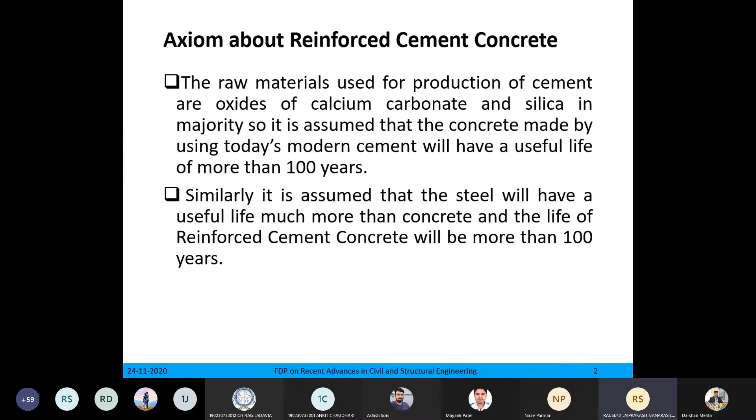Now, what belief we have in our mind is that RCC will have a very long life, and the reason we accept and believe in the fundamentals is that the raw materials used for production of cement are oxides of calcium carbonate and silica in majority, which is a natural item. Its life is, you can say, 1,000 years. So it is assumed that the concrete made by using today's modern cement will have a useful life of more than 100 years. Similarly, as everybody knows that steel will have a useful life much more than concrete, the life of reinforced cement concrete, that is composite material of cement, concrete and steel, will be more than 100 years.

Now, what is the truth which we are facing in today's life? With the advancement in technology in cement and steel, we became more and more confident that any structure made of reinforced cement concrete will have a lifespan of more than 100 years. This is our assumption, we are believing today in this concept, but in the race of development, we forgot the law of conservation of energy, which is responsible for changing one form of material to another form. The cycle time may be few hours to 1,000 years. This we are facing every day in every material, but sometimes we are ready to accept it, sometimes we are not ready to accept the fact.

What is the contradiction? The recent failures of reinforced concrete structures have indicated that if the RCC structures are not properly designed with respect to the environment conditions, which is happening today in many cases, and all practical engineers, if good materials and proper construction practices are not adopted, that may be due to cost cutting, or that may be due to some malafide intention, or proper and timely maintenance is not done. There are so many factors. Multiple occupancy may be there. Everybody may not agree to spending the money for maintenance.

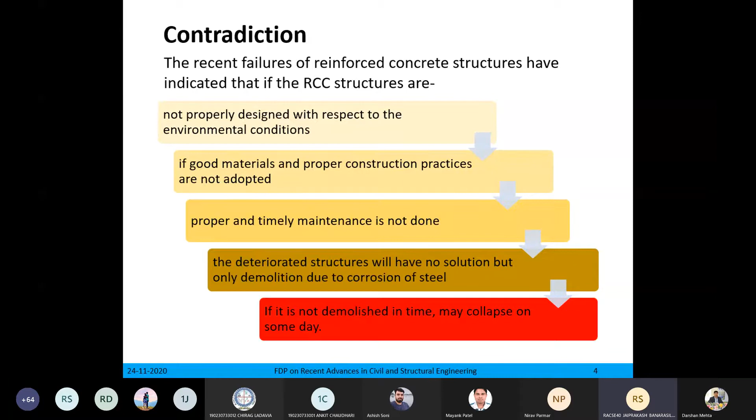We are talking about starting from M5 to now M160. We are going in foreign countries more than that also, but that is limited to very important, costly and unique structures. It is not for common buildings. My point is here that what the general buildings or general RCC structures are facing, for that some solution is required. And this is the reality.

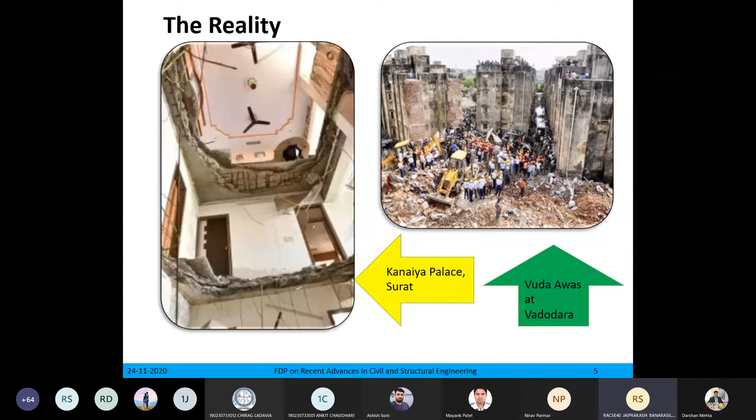This is a very typical case where the 8th floor and 7th floor drawing room fell on the 6th floor slab. The Vuda Awas at Baroda, as the building looks from that, 2 apartments collapsed in the early morning. These are only 2 cases out of thousands in the last 4 to 5 decades. It may be more than thousands.

OK, the first image is of Kanaiya Palace apartment in Surat, built in 1994. In this, slabs of drawing rooms of 3 floors collapsed on 2nd May 2014. You can see the span, it is 94 to 14, just 20 years. And 3 persons lost their life. After that, one committee was appointed by Surat Municipal Corporation. Their opinion was that poor maintenance led to corrosion of steel. Obviously, then simply a concrete mass is there, it fell with its own weight.

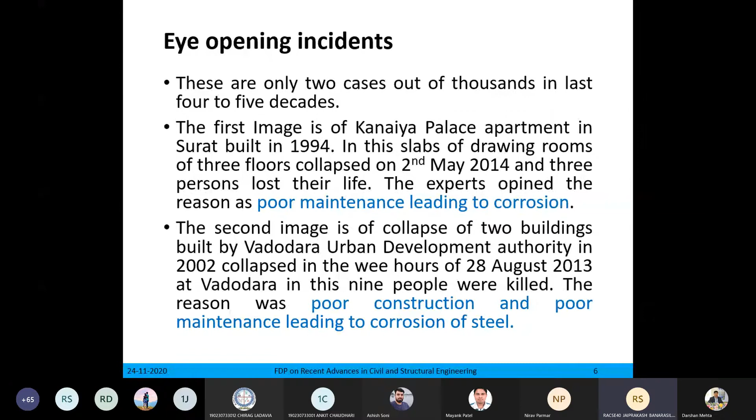The second image is of the collapse of 2 buildings built by Vadodara Urban Development Authority in 2002. That collapsed in the wee hours of 28th August 2013. Here also you can see the span, 2002 to 2013, just 11 years. In this, 9 people were killed. Again, the reason was poor construction, poor maintenance leading to corrosion of steel.

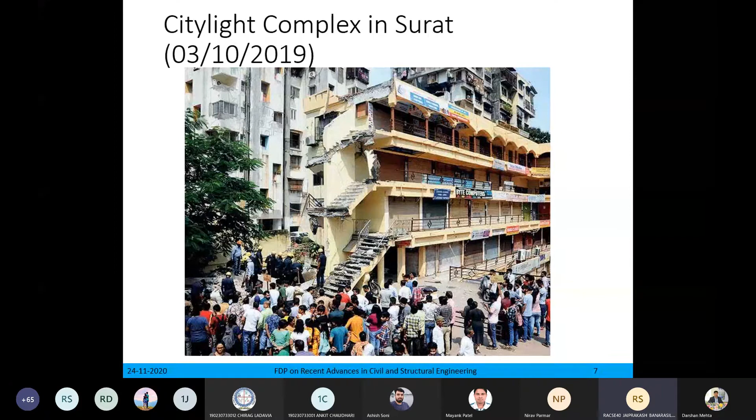Now this is a recent case. This is the case of a staircase. The staircase was external and due to corrosion of steel, on one fine morning, it collapsed. One student got seriously hurt in that because many tuition classes are there in this building.

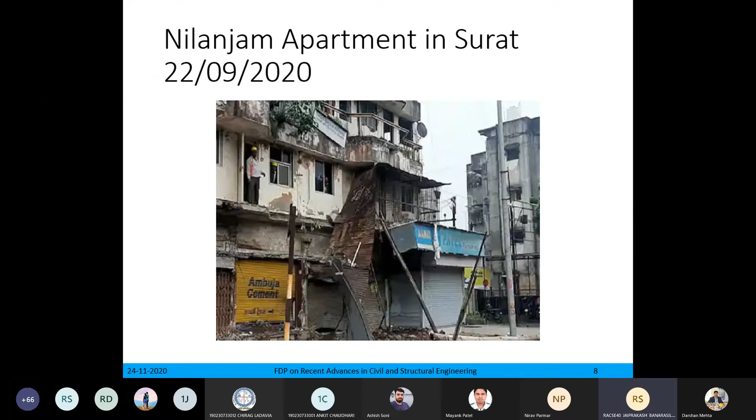This was rejected just 8 months back by the municipal corporation and warning was given to the owners. But here also the case is multiple ownership. It is very difficult. That's why my research was oriented to find some solution wherever multiple ownership is there, because nobody is ready for maintenance.

Then we talk a lot about corrosion. It may happen to any type of material. The definition is: chemical reaction between a material and its environment that causes deterioration of the material and its properties. This is the basic definition of corrosion.

Here we are more concerned about the electrochemical reaction of the steel. In RCC structures, corrosion in both concrete and steel occurs, but corrosion of concrete is a very slow process compared to corrosion of steel. Also, corrosion of concrete gives early warning by its appearance, but corrosion of steel is observed only after it affects the surrounding concrete in the form of cracks.

Otherwise, the picture shows the building. The surface is clearly showing that there is corrosion of concrete. OK, but no care was taken. Then later it affected the steel, and then further corrosion, loss in strength, and collapse.

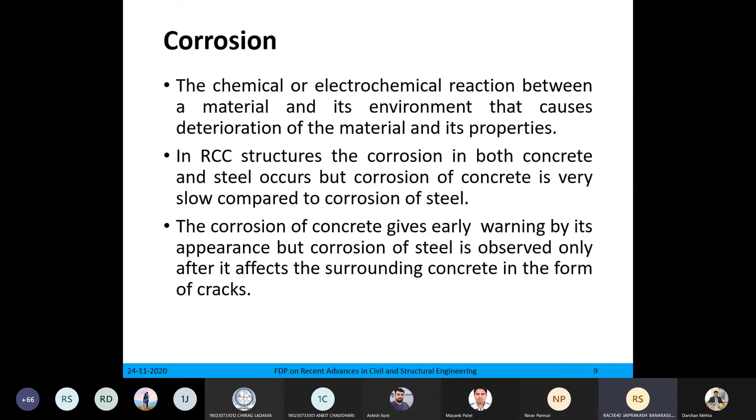Now, as we know there is a need for corrosion protection of steel in RCC buildings, everybody accepts this. It is required because the expected life of concrete is more than 100 years. What we design, we propagate, and we give a guarantee. Every structural designer gives that guarantee that the structure will live for more than 100 years. Similarly, steel also more than 100 years.

The real life of RCC structures, except for a few cases I have gone through where buildings collapse within 10 or 12 years, is generally 20 to 80 years. In Surat, I know many buildings that have completed nearly 35-40 years and are now at the stage of demolition. The major cause is corrosion of steel bars and progressive cracking in structural elements.

Design deficiencies and poor construction along with corrosion lead to failure. Obviously we take a factor of safety of 3, but for any reason there may be some deficiency in the design process, or poor construction due to poor practices or poor construction material. Along with corrosion, that certainly leads to the stage of failure.

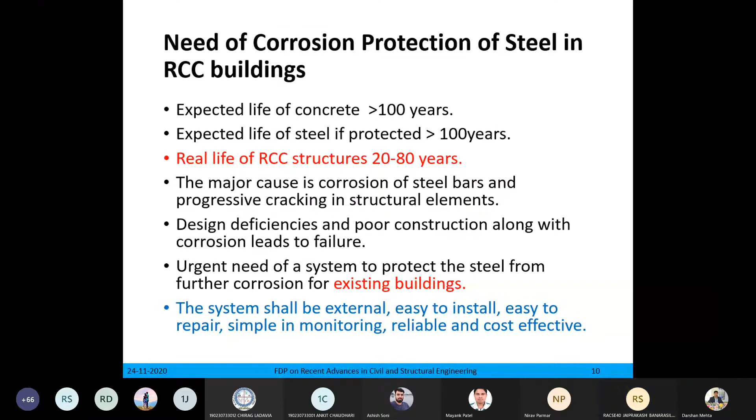And what was the problem earlier, you will see in the next slides. So what was the aim? The system shall be external, easy to install, easy to repair, simple in monitoring, reliable and cost effective. This was the aim from the beginning.

Now, to achieve that, obviously we have to proceed in some direction, so the research is from the fundamentals only. Corrosion process in RCC is electrochemical in nature. The process is very similar to a battery, just like our dry cell: the outside body is made of zinc, inside a carbon rod is there, and between the carbon rod and the zinc body, electrolyte. Positive and negative - so here also the same thing is there in corrosion of reinforcement.

Corrosion results due to flow of electrons between the cathodic and anodic sites of the rebar. Four basic elements are required for corrosion to occur; if these are not there, no corrosion will occur. One is anode, another is cathode, electrolyte, and metallic path.

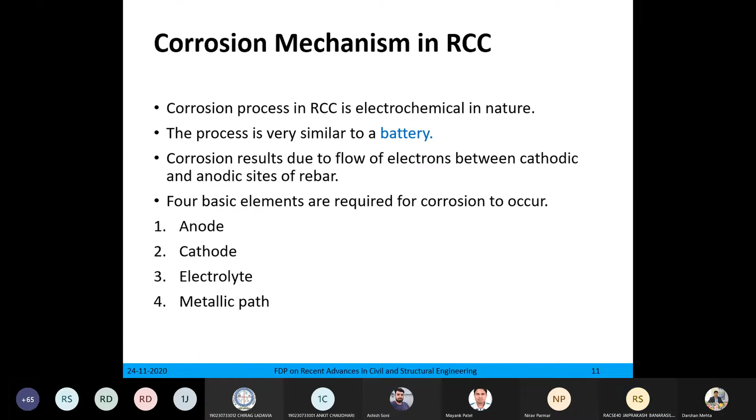So what is happening here? Anode and cathode are both formed in the same bar or connected bars. Electrolyte is nothing but the concrete part - concrete is electrically conductive and in the presence of moisture it is a very good conductor. Metallic path is there, meaning you have to combine these two parts by some metallic connection.

Now, how is this anode and cathode formed in steel embedded in concrete? For corrosion, an electrochemical cell, just like a battery, shall be established. How is it established? The anode is the area where oxidation occurs and electrons are released - this is on the surface of the reinforcement itself. The cathode is the area where reduction takes place, or electrons are consumed. Those electrons move and are consumed by another portion of the steel. This means we are not providing anything from the external side, but still anode and cathode form in the reinforcement.

Steel in RCC acts as only cathode when it is in passive state. Passive means it is on the alkaline side, that is, its pH is more than 9.5. When the passive layer is lost by reduction in the pH of concrete due to carbonation, or by local breakdown, or due to chloride ions, part of the steel acts as anode and the corrosion process starts.

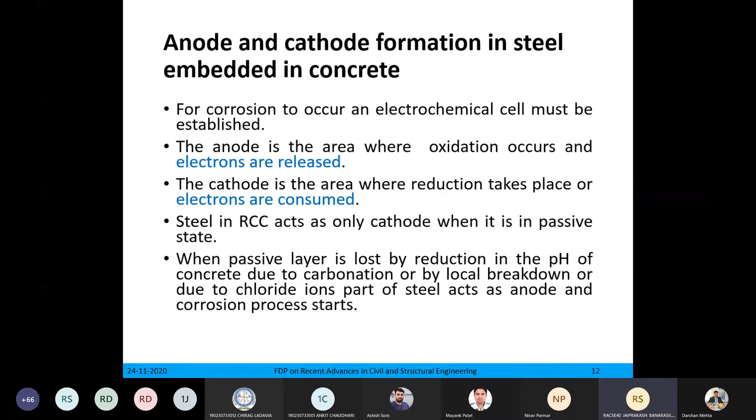Now please remember these words: carbonation, local breakdown, because these two terms will come later on. I'll explain how it is there. Now see, this is the basic reaction, started from, I'll say, high school. The same reaction applies here.

See, iron Fe is achieved from iron ore. For extracting iron, the melting process is done, meaning you are making the steel at a higher energy level, and that energy level is achieved by providing heat and all the processes of metallurgy. Every material has a tendency to return to a comfortable state, its original state. So what happens? This steel is bifurcated into positive ions and electrons are released. This is the natural property of steel for achieving its original state of energy.

And these electrons combine with moisture and oxygen and form hydroxyl ions, that is OH minus. Now these OH ions combine again with the positive iron ions and then ferrous hydroxide is formed. Again, with the combination of oxygen and moisture, ferric hydroxide is formed, and in the final stage, that is at stage 6/7, the reaction gives hydrated ferric oxide, and that is nothing but rust.

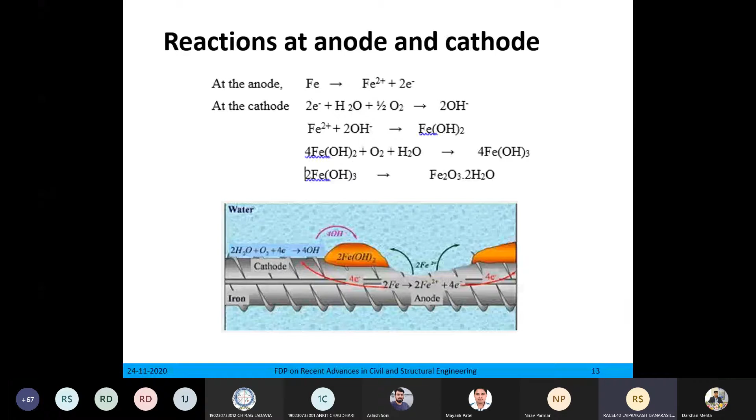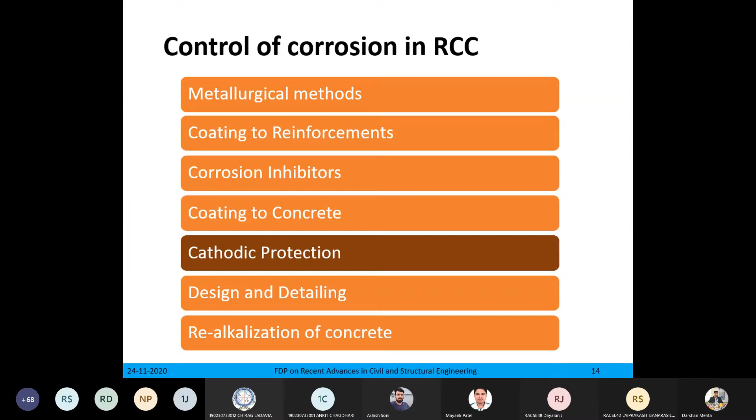Now there are several methods to control corrosion in RCC. Metallurgical method is the best one. Others are: coating to reinforcement, corrosion inhibitors, coating to concrete, cathodic protection, design and detailing, and realkalization of concrete. Now the question is, if so many methods are available, why are we still facing such a problem? See, there are certain restrictions in all these methods.

What is there? See, metallurgical methods. You know that different types of steel are available. One steel was introduced, I'll say, from 1997 onwards, that was corrosion resistant steel, CRS. This is no doubt good. I have seen one construction, I have tested it also. The building is still there, no cracks etc. formed. It's a very small building, ground plus 2. Probably what is happening with CRS steel is not known in the records.

Then another option is we can go for stainless steel, but the property is not available like what is available in TMT bars and all that. So it's a little costly, lifetime is unproven, and it is not common either. Tata Steel and SAIL are making it, but there is no record that it is now very commonly used for corrosion resistance. But still, lifetime is very good for that. So this is one method, we can go for CRS, but here also we cannot say corrosion will not occur, it is only corrosion resistant, not corrosion proof steel. Stainless steel is not used much because it is costly, and other properties are not suitable for RCC structures.

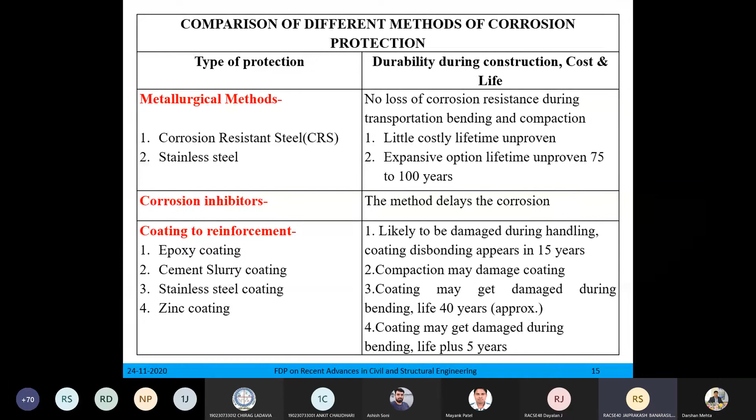Now zinc coating is very good, but here also damage during construction is possible. If at one place the coating is removed, that will behave as anode and rest part of the steel will behave as cathode.

Now coating to concrete, water-based and polymer-based coating. Everybody is seeing this now in the construction of flyovers - after that, that greenish color is on the concrete surface. It is nothing but the water-based coating which protects the concrete, meaning it gives an impermeable surface so that moisture and oxygen do not enter, and also it gives an aesthetic appearance.

Here also no data is available because this is a newer thing, only the last 20 years we are seeing this. So how much life is protected is not sure, but I am sure that once you are covering the concrete by any type of film, that is certainly going to protect concrete from carbonation and further ingress of oxygen and moisture.

Design and detailing - once you take care in design and detailing, this becomes the most economical and durable method. Along with that, if proper design and construction practices are followed, this is the most economical method, but we are lacking in this only. That's why we are facing this type of problem, that is corrosion.

Then next is cathodic protection. See here, just as I said that once we are making the circuit, just like a battery - nowadays whatever cells are available, otherwise previously it was happening that the outer body will get corroded and leakage will be there. Nowadays also, if you do not touch that battery for 1 or 2 years, you'll find that it is leaking, meaning the body is completely consumed.

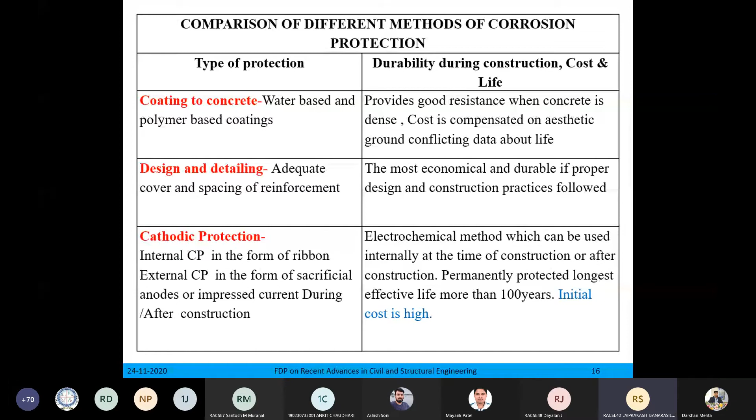Here what is happening in this cathodic protection is that we are arresting the electrons, which is responsible for the electrochemical reaction. So obviously once electrons are not available, corrosion will not occur. Its initial cost is high.

Now one more method is the realkalization of concrete. The impressed current is applied to increase the pH of the carbonated region of the concrete to a satisfactory level. This is on the experimental base. Few structures have undergone this process, and obviously this is very complicated and costly.

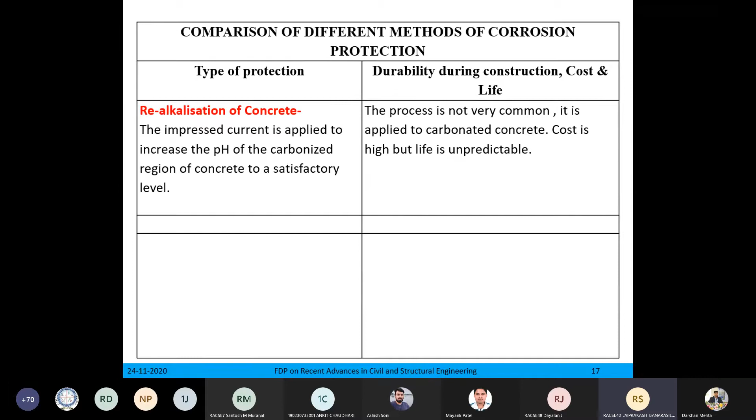The reason is that you have to go for repairing, you have to go for making a layer, and from that you apply impressed current. That impressed current will improve the pH of the rest of the concrete. So obviously if a big slab is there, or a building is there, how is it possible? One by one, okay? Because if many elements or a horizontal surface is there, then it is okay. But for beam, column, slab type of structures, it is never possible.

Now this table gives comparison of various corrosion protection methods. See, some methods, just like the metallurgical method - it is manufactured in steel plants, it is costly, but it can be used. But this method is before construction, meaning at the time of construction only you have to use this steel.

Then corrosion inhibitors - this is also during construction. Here cost will vary depending upon the cost of the chemical. Then coating to reinforcement - this is also a very complicated process. Epoxy coating, you know that cost is more. The reason is that it is processed in manufacturing plants.

Cement slurry coating, nowadays it is not common. Zinc coating, again it is processed in manufacturing plants. So obviously these methods are before construction - you have to select the steel, go for coating, and then use that in construction.

Coating to concrete, it is good as I have said, but do you think that all structures are coated in that manner in which flyovers are coated or bridges are coated? No. Design and detailing, as earlier said, is the most economical method.

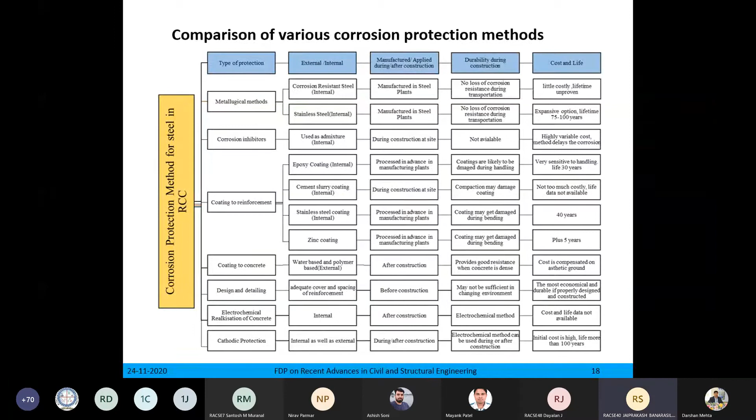So, realkalization and cathodic protection. What about durability, cost and life - everything is compared from the literature.

Now 2020 is completing 200 years of this technology. Very old technology - in 1820, Sir Humphry Davy used cathodic protection in naval ships of the Royal Navy. From there this technology started. This was similar to consultancy work - the Royal Navy approached him because he was an expert in electrochemistry. So he investigated and then provided this technology to the Royal Navy, and it was used in those naval ships.

Then in 1834, the research student of Sir Humphry Davy, Michael Faraday, discovered the relation between corrosion, weight loss and current. Because here, one thing is that we are using one metal to protect another metal, so obviously the cost is important - how much material will be required. That is also important. So that part was done by Michael Faraday.

Then Thomas Edison in 1890 experimented with ICCP, impressed current cathodic protection. Here we are not using two different metals - we are using external current to the positive terminal to arrest the electron, but that was not successful.

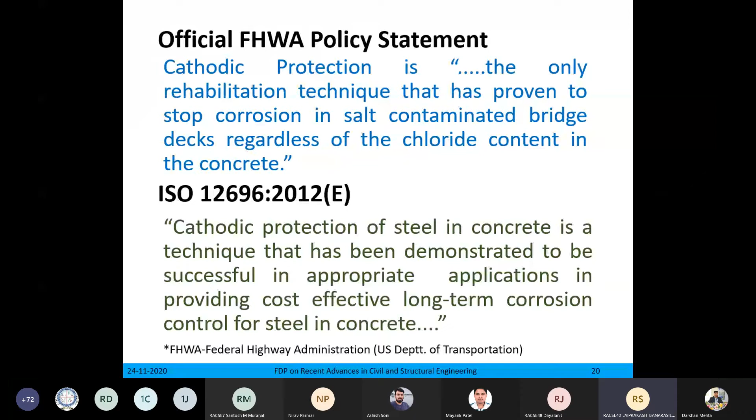Then in ISO 12696, it also says that cathodic protection of steel in concrete is a technique that has been demonstrated to be successful in appropriate applications in providing cost-effective long-term corrosion control for steel in concrete. Then the British standard also says that cathodic protection is a means, possibly the only means, of indefinitely extending the life of reinforced concrete structures which are suffering reinforcing steel corrosion arising from chloride intrusion.

Now the question is, if these authorities say that this is the only means and this is proven to be successful, then where is the problem? Why is it not implemented to protect steel from corrosion?

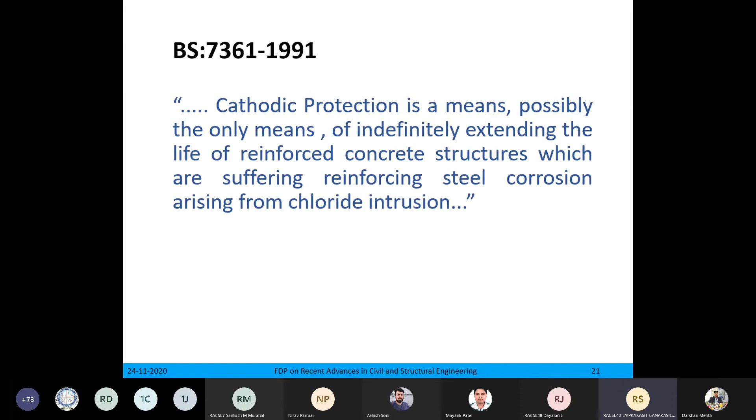There are many documents which give approvals of CP for RCC structures - FHWA in 1982, UK Concrete Society in 1989, NACE, the National Association of Corrosion Engineers. This was started initially by 9 mechanical engineers, and they were mostly concerned with steel structures or industrial structures, but later on they became almost the authority for giving so many guidelines and handbooks for corrosion protection of steel and other metals. Then the American Concrete Institute literature is also there, then the BS code, the British standard, then the European code.

Now there is one doubt among people - whether cathodic protection to new structures can be installed at the time we are putting in generators and other facilities, or any RCC structure and ancillary works we are doing - whether with that, this CP system can be installed.

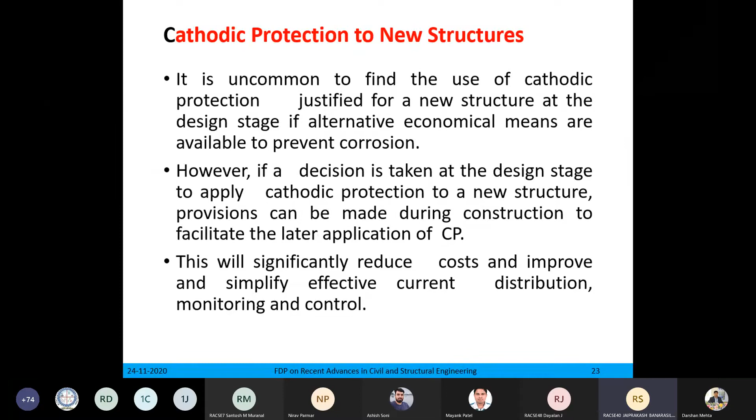Now, what type of CP systems are used? One is impressed current cathodic protection system. Here the large driving force available can protect a large, even uncoated structure in high resistivity environment. High resistivity means the electrolyte being considered has very high resistance, so current requirement will be more, driving potential will be more. So we cannot use the natural EMF of the metals.

In that case, impressed current cathodic protection system is required. Here only few anodes are required because the material is not consumed. External current is provided, the positive terminal attracts the electrons, so there is no consumption of anode material. The voltage may be adjusted to allow for environment and coating changes. You can adjust the voltage and current.

This impressed current cathodic protection system, wherever the substations are there, you will feel it is similar to the substation of an electrical transformer. The same things are used, only here the potential may range from 10 to 24 volts. In our case, whatever substation is there, that is 11 kV stepped down to 440, and at home it is supplied as 220. But there it deals with lower voltage, yet the system is similar to that only.

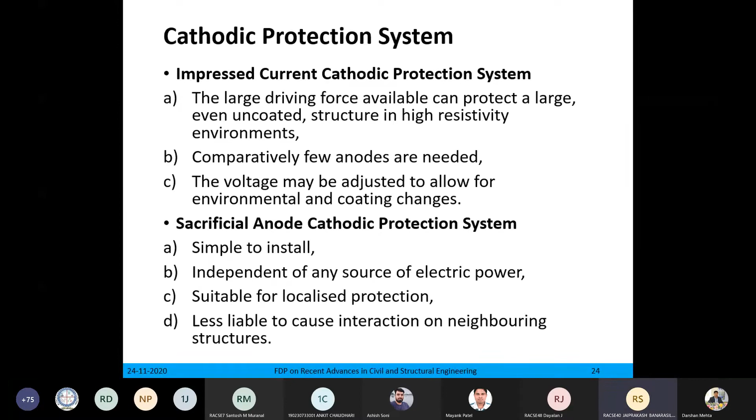Now, what is this SACP? Sacrificial anode cathodic protection means the anode will be consumed, it will sacrifice itself, it will be corroded, and it will protect the steel. That's why the name is sacrificial anode cathodic protection.

How does it happen? Corrosion takes place when two metals are immersed in a conductive solution or environment. It is just like at school level in physics, where you immerse two rods, zinc and copper, in acidic solution, and show that some potential is developed and current is flowing. The same thing is here.

The potential difference facilitates electron flow between these two metals. The less resistant metal becomes anode and the more resistant metal becomes cathode. Due to flow of electrons and involvement of dissimilar metals, two metal corrosion occurs. The driving force for current and corrosion is the potential difference developed between two metals - just as I said, similar to a battery. The same thing is here.

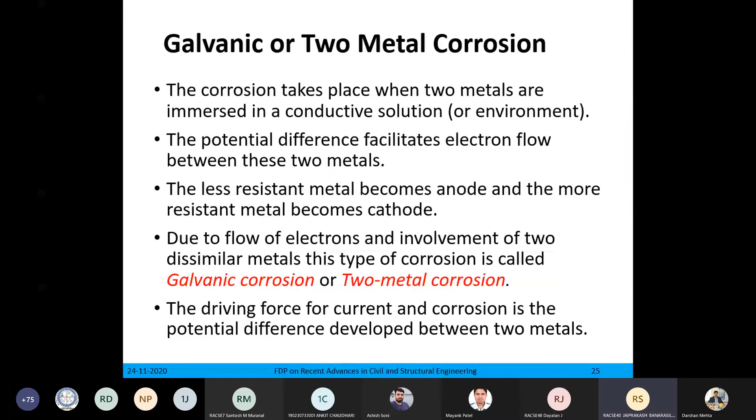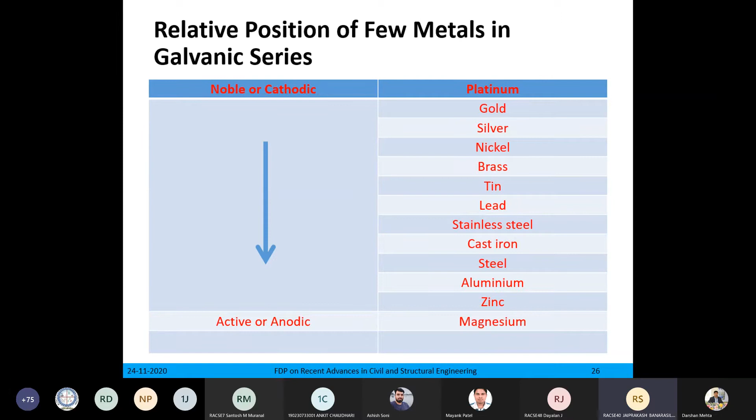So once you move from platinum to magnesium, magnesium is active. Platinum is, I'll say, noble or less active, or non-active.

So when we connect these two dissimilar metals electrically, obviously electron flow will be there, and the more anodic material will be consumed while the cathodic material will be saved. This is the basic concept used in the cathodic protection system.

So we have to select these two metals. One is already sure, that is our steel bars, that is minus 0.44. The other material we have to select from the lower part, either zinc or magnesium, embedded in concrete.

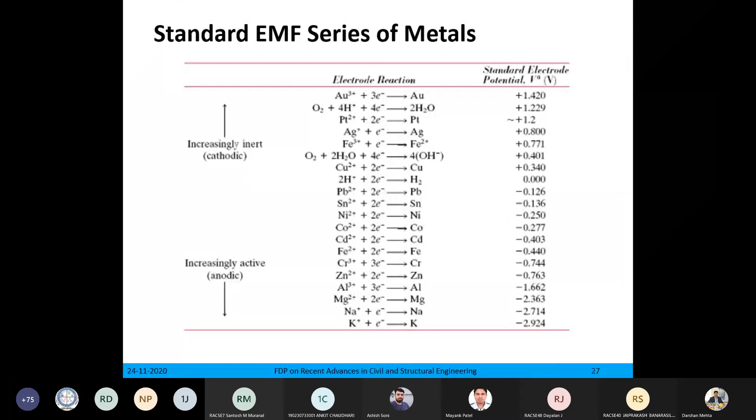The electrolyte is nothing but the saline water of the sea, which provides conductivity between these two metals. Electrons start flowing from the steel body of the ship to the zinc bars, and the zinc bars absorb those electrons and corrode themselves, or sacrifice themselves, and then the ship is protected.

Otherwise, the concept is that if the ship is made of metal and is in sea water, how is it possible that the ship has a life of 30-40 years in the sea itself? Similarly, the reinforcement protected by concrete also has a life of 30 to 40 years. So this is the reason.

And when the ship comes back to the shipping yard, these bars are changed again. Here consumption is too high because on one side a very large amount of steel is there, and the other part which is protecting, that is the zinc bars, whose size may be 2 meter or 1.5 meter.

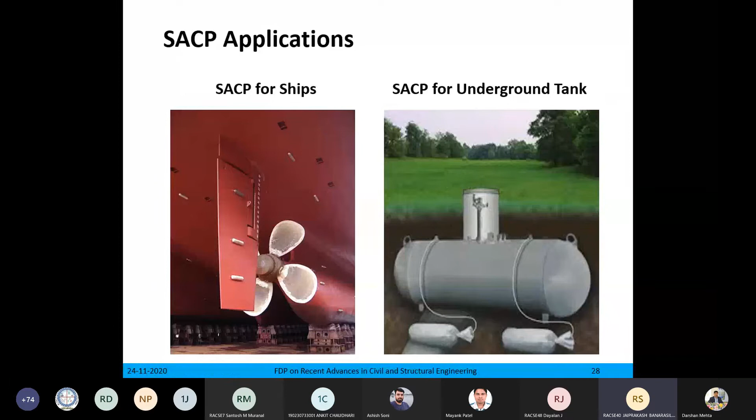After some time, these anodes are replaced. So it is very successful in protecting the oil industry and shipping industry. For jetty also, there is no problem. Simple bars are connected with an insulator, and the saline water works as electrolyte.

Current flows between those two metals. Electrons are released and they are consumed by the zinc bars. After some time, these zinc bars are replaced. In case of pipelines, the pipeline is connected with sacrificial anodes. The metal inside is packed in backfill material.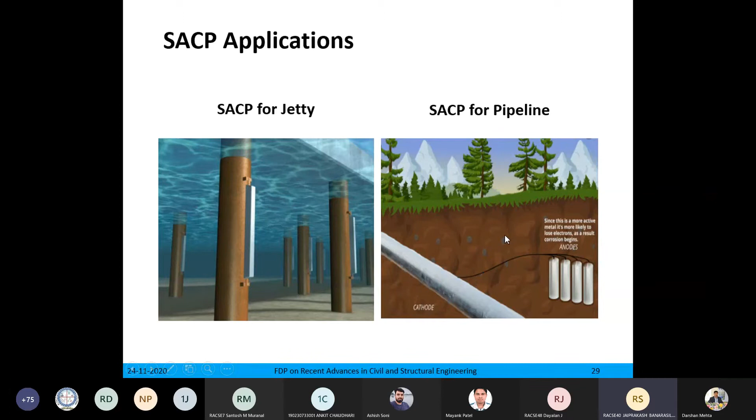So it depends upon the resistivity of the soil. On that basis it is designed and placed at some distance. But this is only during construction. After construction, another method is used.

Now, how do we go for sacrificial anode cathodic protection with monitoring? See, this is our steel bar in concrete, and this is the sacrificial anode. One terminal is taken from the wire, connected to the data logger, and another is taken from this...

...sacrificial anode, and that is also connected to the data logger. These two metals have different EMF values, so obviously a cell is established, and with this cell, current starts flowing. This releases electrons, and that is recorded by the data logger. That potential difference is also recorded by the data logger. This is the basic concept.

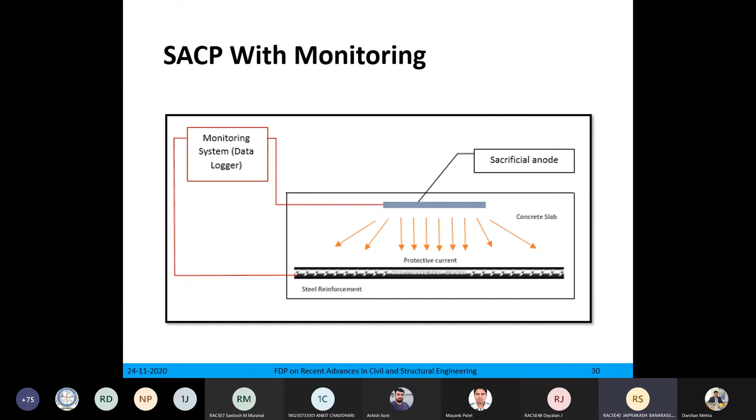Now these are the sacrificial anodes of zinc used for pipelines. This is 1 meter length and 100 mm diameter. Whenever construction is going on for pipeline laying, 300 to 700 meters approximately is laid, then after some gap, another 300 to 700 meters. This length is connected with metallic wire to this anode, placed at 3 to 5 meter distance, and the soil between these two acts as electrolyte. Whatever electrons flow through this circuit are absorbed by this zinc anode, and it goes on corroding.

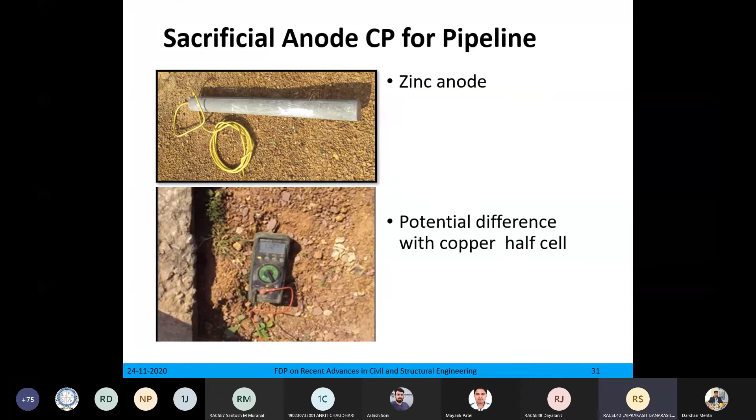So this is from the IOC project near Raipur.

These type of terminals have wires taken around about 300 to 400 or 500 meters also to the nearby road, because every day it is to be monitored what is happening. So terminals are there, number of terminals you can see. One terminal gives only to zinc anode, another is for only pipeline, another is between zinc and pipeline. Double wiring is done, so suppose one is damaged, you have not to excavate, you can use other terminal.

These potential differences are measured regularly, and when this whole pipeline is laid, the intermediate pieces are connected throughout, and then the whole system is placed on ICCP. This means current and potential difference is provided externally to the pipeline, because anode is a costly item. So for a pipeline, a number of anodes may be required. Then again, inspection of that anode is needed, whether it is available or totally consumed, so that becomes a costly process. So the whole system is shifted to ICCP, meaning externally you provide current, and you are not depending upon the potential difference of two different metals.

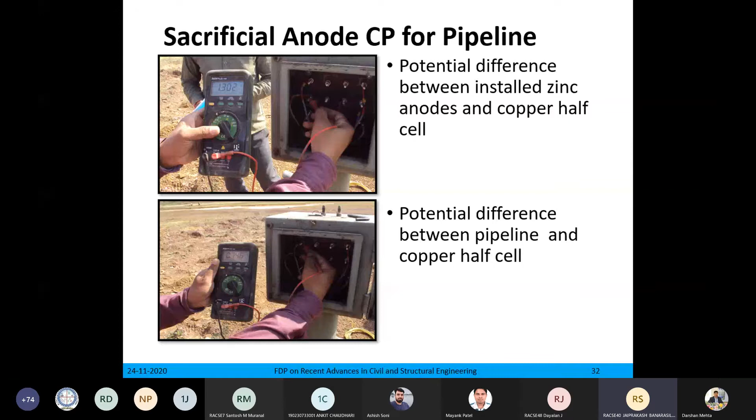Now, what type of anodes are used for RCC? One is this discrete anode, these small round-shaped pieces. This is placed in the concrete and the wire is connected to the reinforcement. So one connection is through the wire, another is through the concrete, which acts as electrolyte. Here a ribbon is placed near the bars, connected with plastic clamps, and at the other end it is connected to the reinforcement.

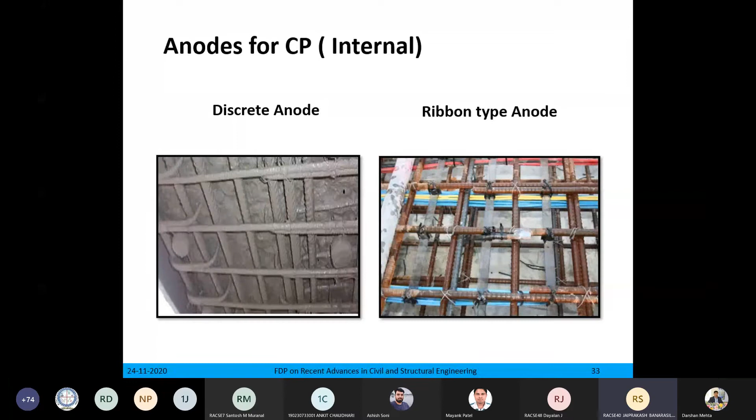So what happens here? Whatever electrons are released by the anodic sites of steel are collected by this ribbon and consumed. But this can be used during construction only, so every time it is not possible. After so much experience, you can see how many people are using this type of anode in construction. Probably nowhere you must have seen it used, except for very important structures, especially in the oil industry, where they take care of this.

This is mesh type anode. Generally, suppose a retaining wall or bridge abutment is there, and you know that reinforcement is corroding. So the top layer of concrete cover is removed, and then this mesh is clamped by nails, and on that again rich mortar is applied, so it is inside, and somewhere in between they are connected to reinforcement at some intermediate level. That completes the circuit. After that, this anode mesh will be consumed, but we cannot monitor what is happening inside, in the previous case and in this case also.

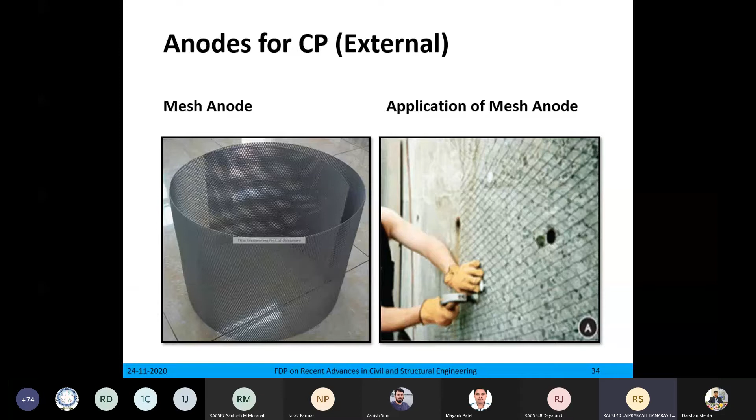This is magnesium anode with backfill. Backfill material is generally bentonite and gypsum, which provides good conductivity and retains moisture for a longer time. Its proportion is 75% gypsum, 25% or 20% bentonite.

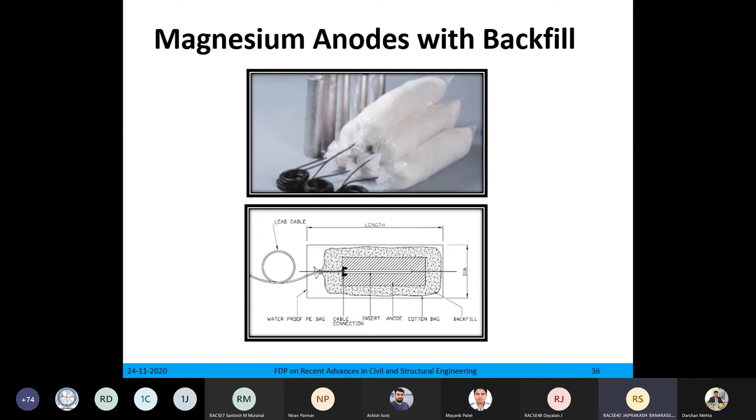Now, looking at all these problems, it was envisaged that there is a need to develop a type of anode which will overcome the difficulties of cathodic protection available in the market. So development of a sacrificial surface anode for cathodic protection of RCC structures was planned. Two facts are there: the cathodic protection system is well established, as seen in previous literature, for metallic and other structures, but a simplified system is required for RCC structures, because so much complication means people are probably not ready to accept it. So even with the guarantee of protecting steel from corrosion, this method is still not common.

The existing sacrificial anode cathodic protection systems are either internal, like discrete anode and ribbon anode, or external, like mesh anode and probe anode, in which direct monitoring of anode is not feasible. Once people invest or spend money, they want a guarantee that it is working. So there is a need to develop a cathodic protection system for existing buildings which is external, easy in installation and replacement, facilitates monitoring, causes no loss in aesthetic appearance of the structure, and is reliable and economical. So this was the requirement.

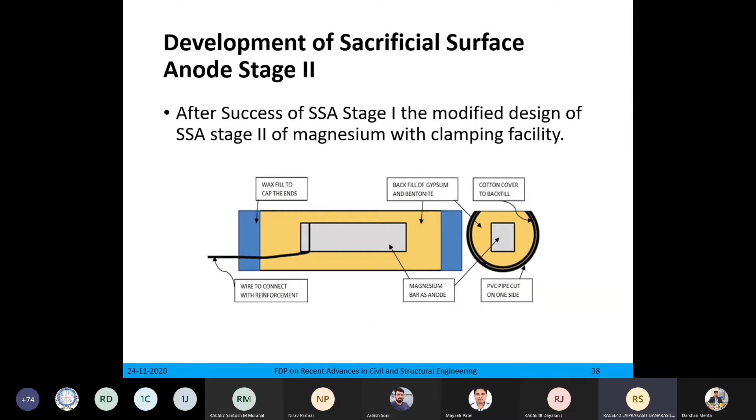So this building was repaired. At the time of repairing, you can see that all borders are repaired. Spalling of concrete was there, that was removed. New reinforcement was added in some places, and in that reinforcement, after cleaning the surface properly, wires were connected, and those wires are taken out at the time of plaster.

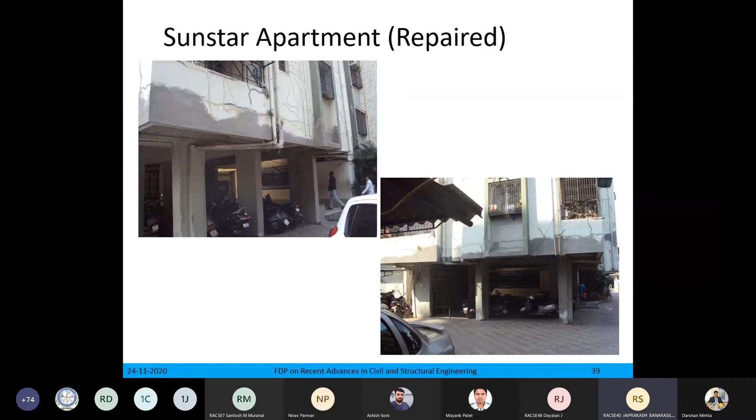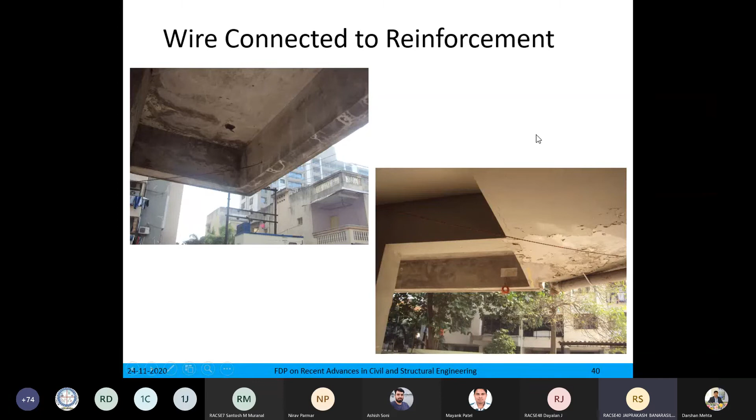So a terminal is available, you can see this here. These wires are available. If you see here, it is from the reinforcement. Here also it is from the reinforcement. Such wires are taken throughout the periphery of the building. It is a multi-story building.

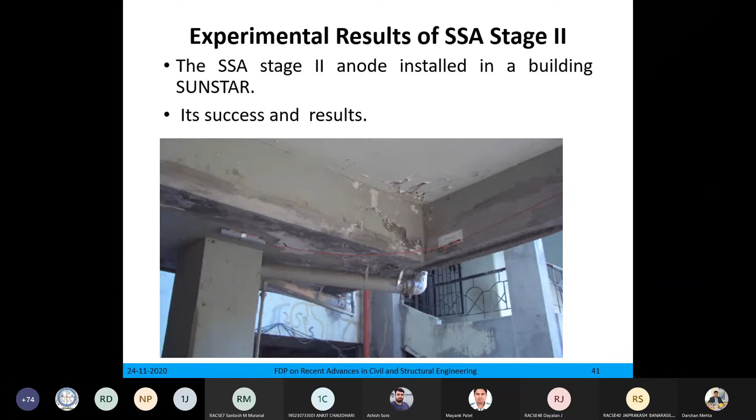Now here this anode is attached, and it is permanently attached, and these terminals are separated for recording the data. That is the difference of potential between the reinforcement and this anode.

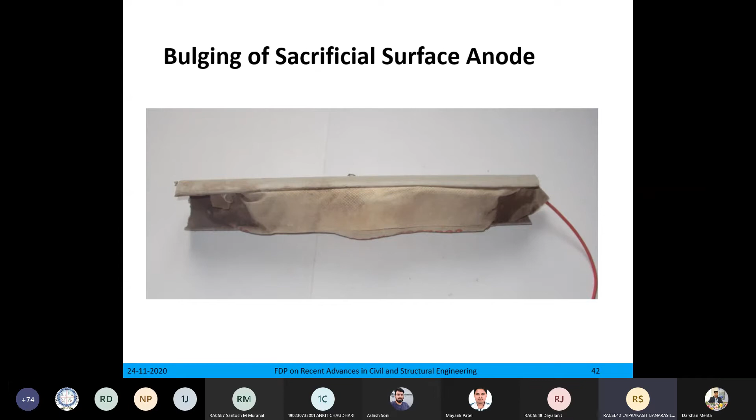After 2-3 months, this was the condition: bulging of the magnesium rod was there, volume expansion due to corrosion, and this was taken out, and this is the condition. See, no current is provided, nothing is added, only two metals are connected together having different EMF, and this is the original, and the rest, the next one, is corroded.

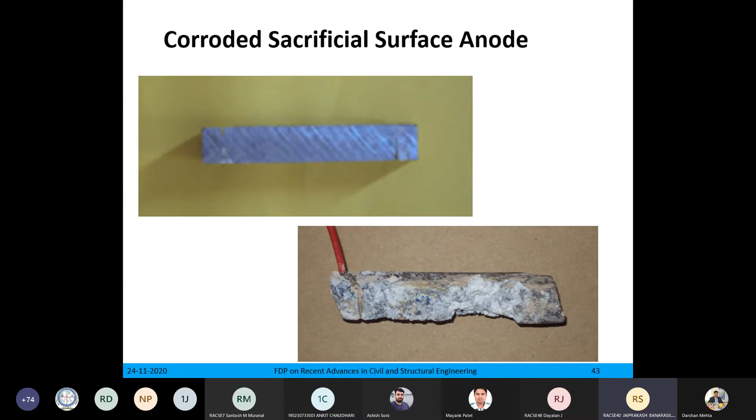And these were the potential measured between these two, that is the magnesium anode and reinforcement. This is also a pattern on some other day. At different days, these are calculated. 2017.

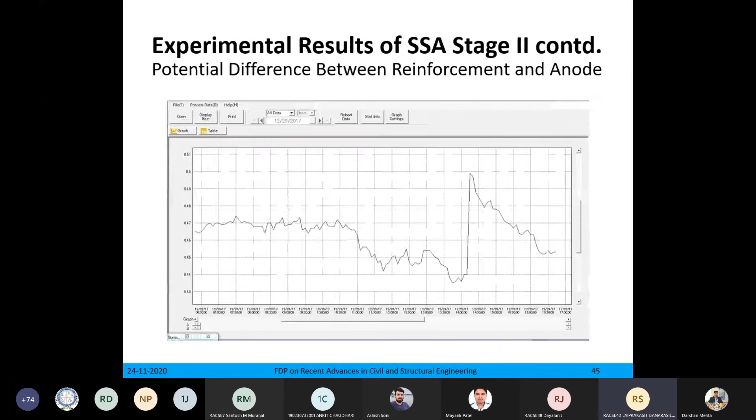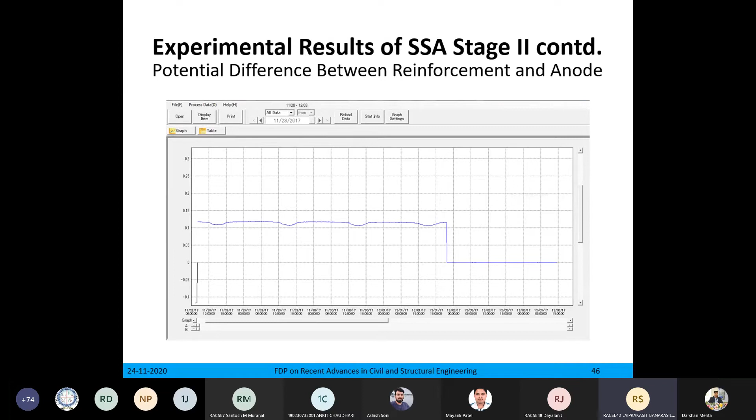Now here, if you see this, a drop in potential is there. This drop in potential is due to drying of the surface due to sunlight, which affects the conductivity of concrete. So this was successful, showing that once potential difference is there, corrosion is taking place, electrons are going to flow, and that is to be arrested by anodes. So this field study provided sufficient proof that this sacrificial surface anode is a success.

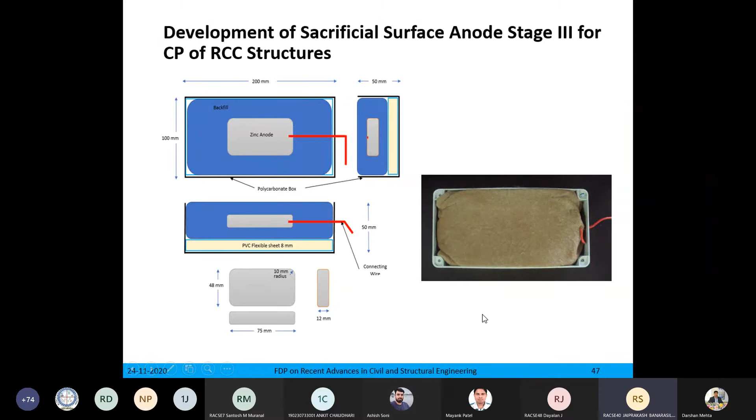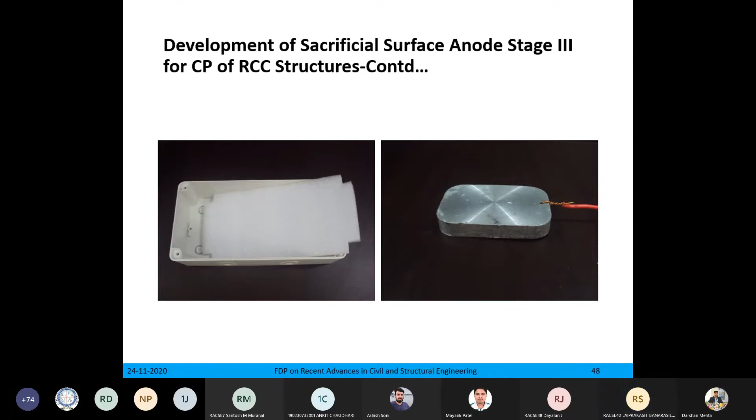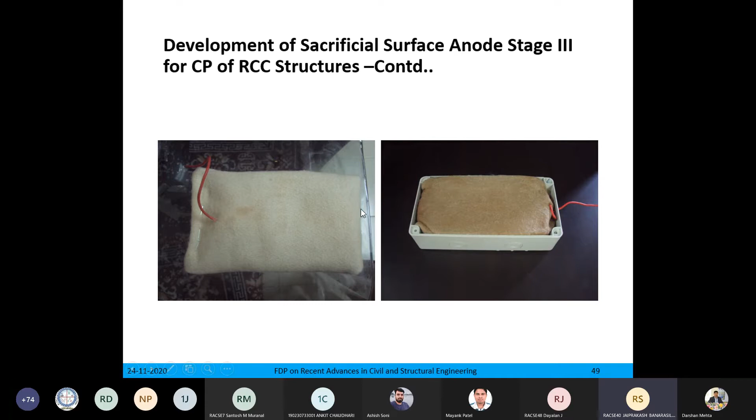These are the stages of manufacturing. This is the PVC sheet cut to size. This is the zinc piece, pure zinc. Now this is filled in the bag with backfill. And this cloth is of a quality that allows the entry or movement of moisture, so that it will give contact with the concrete surface.

Now this is the working of SSA. You put it on the surface of the concrete, on any RCC element, and electrically you have to connect these two: the anode and the reinforcement. These two are to be connected electrically. The rest part is the concrete cover, and its conductivity is very, very important. The whole system works on the basis of the conductivity of the concrete cover.

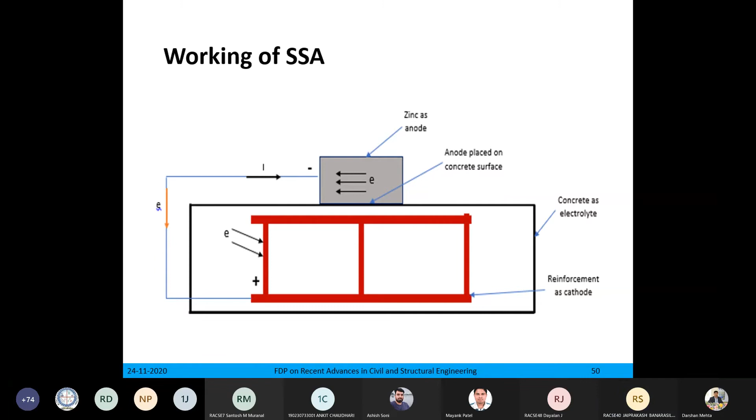Now, how can it be applied to columns? Suppose one multi-story building is there. On the top, you just open the reinforcement, or if it is already open due to corrosion, remove everything, clean that bar, connect two wires to two different bars, and check whether these two wires are providing continuous electrical conductivity.

If it is okay, it means whatever stirrups are there are facilitating the flow of current, so one thing is sure, that connectivity is there. Then that top wire taken from the top is connected to the data logger, and another terminal from the data logger is connected to the sacrificial surface anode, the terminal available in the sacrificial surface anode. The data logger will record the potential difference between these two metals, that is, the metal used for SSA and steel. That will measure the current flow between these two, and also the potential difference.

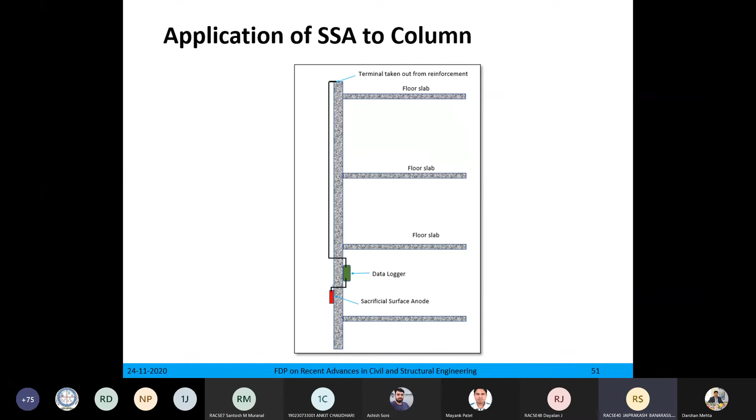So it is sure that whatever electrons are released are converted to current, and now this current is measured, and obviously, if it is connected electrically, the surface anode is going to absorb those electrons. So there is no doubt that it is working. In all other methods earlier explained to you, whatever is available in the market, I have seen the websites of almost 200 companies, and nobody is providing such a monitoring system that assures you it is electrically connected.

Now this is the building in which this study has been done.

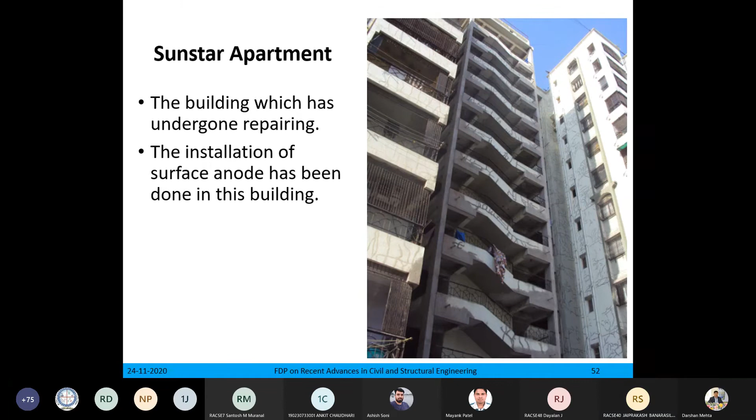Now these are the terminals as I have shown. This is the improved SSA attached to the surface of slab, and this slab is below washroom. Obviously here moisture is there, so maximum chances of corrosion are there. That's why it is attached here.

So 2A and 2B points are given. 2A is the point of anode, and 2B is the point from where the terminal from reinforcement is taken.

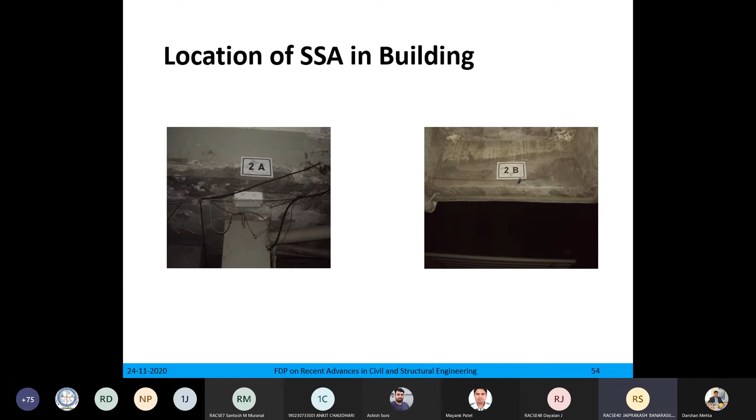And after success of this, the sacrificial surface anode - this is a new term. In all literature you will find ICCP and SACP, sacrificial anode cathodic protection. I have used the term sacrificial surface anode. It is not embedded in concrete, it is on the surface of concrete and uses the electrical conductivity of the concrete cover. So I applied for a patent.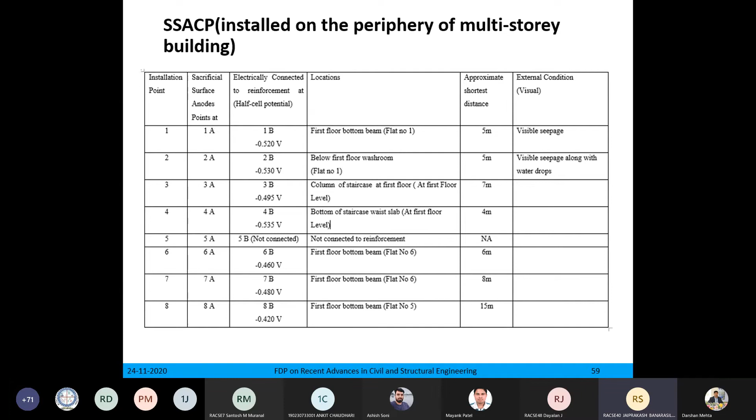So these many terminals are connected, and on that basis observations are taken and recorded. If you see the pattern, the first one is potential difference and the second one shows the current.

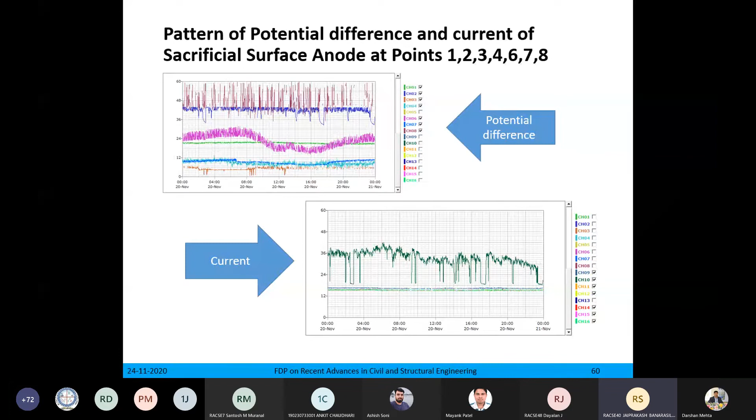The potential difference obviously depends upon the resistance between these two points, that is anode point and cathode point, from where reinforcement is taken. Flow of current gives the stage of corrosion. Potential difference, this is for 1A and 1B.

Here it is uniform. Uniform corrosion is there, it is taking place, but it is uniform.

If you see this 2A and 2B, here current flow pattern is very high, if you see from the zero value, bottom value, and potential difference is available that allows the flow of electron, generation of electron is there due to corrosion. Both things are available here.

This is between 3A and 3B. Here uniform current flow is there, and whatever drops and peaks you see in the potential difference, that is in between. Suppose due to some reason connectivity is not there, so that gives the drop, because concrete is also conductive, but you cannot say that it is conductive like metals.

This is again point 8A and 8B. Here you see that uniform corrosion is there, so that can be stopped if it is connected to anode. These things are not visible.

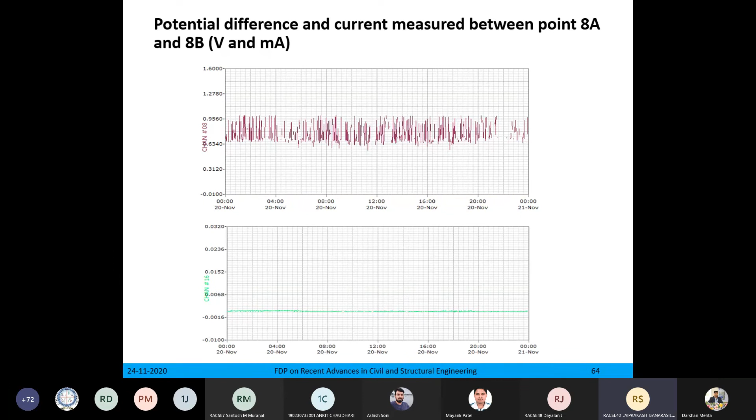It is so low current that to procure such type of data logger which records current in micro ampere is also a difficult part. Now if you see the stages, sacrificial surface anode, then connected to this 2A, 2B, then these are the readings. And this is the condition of zinc anode after 3 months, you can see this after removal for inspection.

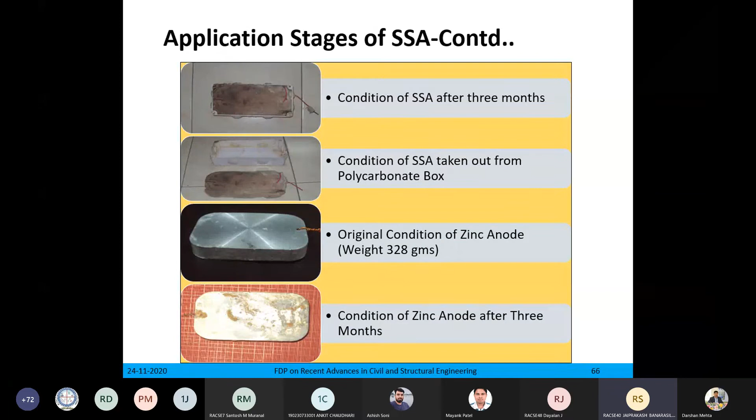Now, what various SACP systems are available? Sometimes people ask that when already SACP is available, why this is required?

In probe type anode, this requires drilling of hole and probe is inserted into concrete along with backfill. Monitoring through measurement of voltage and current is possible, but nowhere it is given how to measure this. There is possibility of cracking of concrete. If it is a column, it is very, very risky. Beams, columns, probably if it is damaged, more drilling means more risk.

Mesh and ribbon type of anode, this is placed on the surface of concrete and is covered by low resistivity mortar. Ribbon can also be placed by making a groove in the slab or groove in the beam, put inside, and again covered by rich mortar. Here also monitoring is not possible except from surface appearance and crack development. You can say whether it is working, still material is there, anode material, or it is totally consumed.

Thermal sprayed surface coating, it is just like spraying zinc, molten zinc on the surface. This technology is costly, not used for RCC structures. Monitoring is not possible. It is similar to galvanized iron sheet. If you have seen GI sheets, shining sheets are available, after some time it becomes red. Total zinc on the surface is consumed by this process, so it becomes red. Whatever old sheets you see, that becomes brownish color.

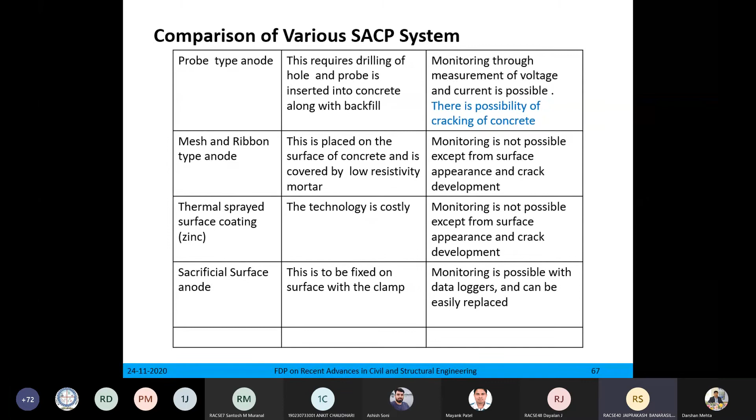Now, what is the benefit of this sacrificial surface anode? This is to be fixed on surface with the clamp. We are not breaking or damaging the concrete surface. Monitoring is possible with data loggers and can be easily replaced. If I am attaching, we can remove 4 screws and place another one. So here replacement is also very easy.

Now what factors influence the working of SSACP? Once you are dealing with the structure, number of factors may be there. One is water cementitious material ratio, obviously cement content is going to affect the density of concrete, so conductivity of concrete. What type of cementitious material you are using is also going to affect it. Presence of salts in concrete making materials, age of concrete, density of concrete, size and type of aggregate, air voids in concrete, degree of saturation, temperature. This 8 and 9 number are more influencing factors.

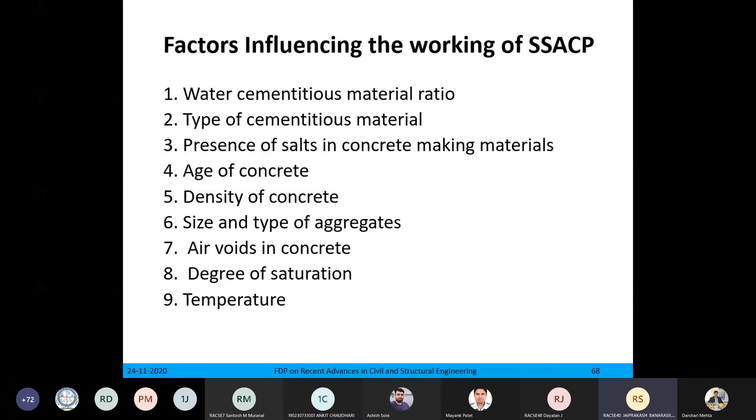See, effect of temperature, you can see that it is for 20th November from midnight. If you see that morning 8 up to this point, after that this location of the anode is in sunlight side from morning. So from 8 it starts dropping, 12 noon, then 16, and then after that it again regains its potential difference.

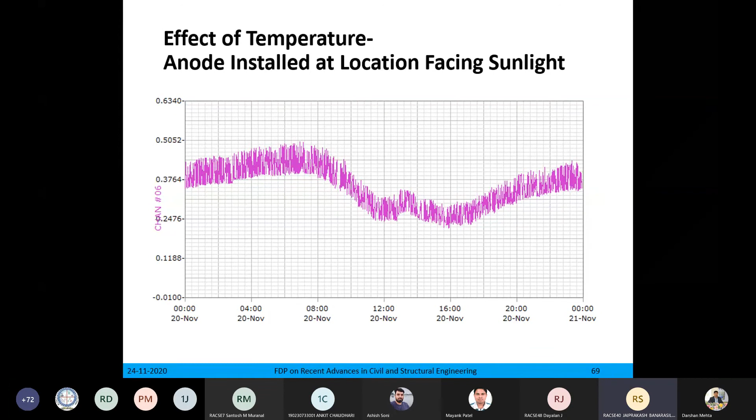It means whenever concrete becomes somewhat dry, the potential difference drops, the resistance of concrete increases. So if moisture is available, moisture is one of the major factors, and that gives more conductivity, so obviously it is useful for the working of SSA also.

Now, the next part is why CP is not common for RCC buildings.

This technology is 200 years old. In buildings, it has been used for the last 20 years, but not very commonly. The reason is that the cost of buildings is considered very less compared to the cost of bridges, cooling towers, and other RCC structures. So once we consider that the cost of the structure is less, why use this costly technology to protect steel from corrosion?

Second reason is that in one building there may be multiple ownership, so decision making is difficult because nobody gives a guarantee that it is working. So obviously people are not ready for that. There is always dispute when multiple ownership is there.

Second, the general perception of the public is that if repaired or rehabilitated, the structure element remains good for a very long period. Even all of you think that once you go for repairing, it is good again for 20-30 years. No, it will last only 3 to 5 years, till the pH of the new concrete or new mortar which you have placed does not fall below 9.5.

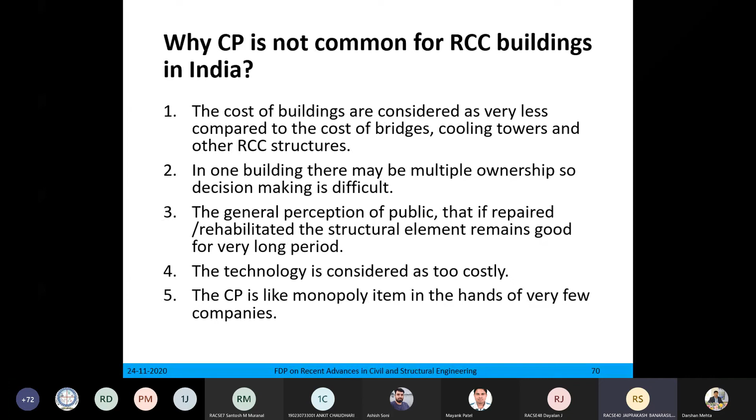Another point is that CP is like a monopoly item in the hands of very few companies. In India, these companies are very rich because they deal with the richest customer, that is the oil industry. So obviously they are not interested in RCC structures, they are interested only in the oil industry and whatever is related to that.

Another reason is that, as the European standard says, cathodic protection of steel in concrete is a specialist multidisciplinary activity. Expertise is required in the fields of electrochemistry, concrete technology, civil and/or structural engineering, and cathodic protection engineering. They use the word cathodic protection engineering, meaning it is again a specialized branch. So if it is multidisciplinary, it becomes very difficult to justify anything.

I took help from the metallurgy department at Dr. Gandhi Diploma College, and help from electrical engineering and electronics also, because measurement of such small voltage and current was very difficult. Measurement was possible, but recording was not possible. So I wasted almost 6 months searching for data loggers which can record currents in microamperes, because you do not know which type of equipment is required. So this is also one of the reasons it is multidisciplinary, and that's why it is not common.

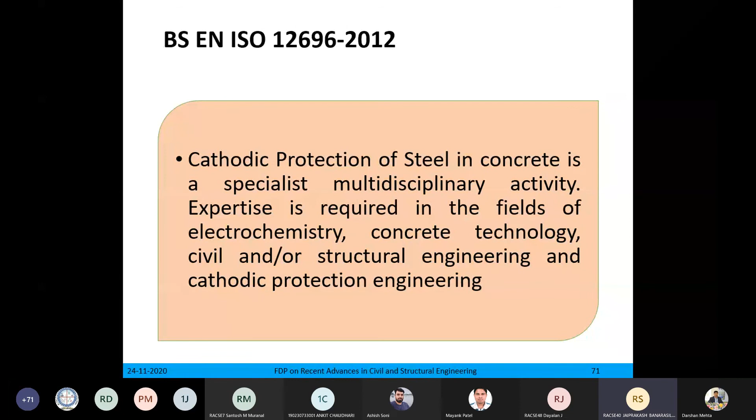That's why it is not common. Now,

How is it feasible? What is the economics of this sacrificial surface anode? The cost of one SSA is around 1000 to 1200 rupees. The cost of a data logger varies from 1 lakh to 3 lakh rupees, depending on how many channels - that may be 64 or 96 channels. The cost of wiring is less than the cost of CCTV wiring, because here we can use 4 core, 8 core, or 16 core cable, and that cable will move to the data logger point.

And the small wires can be connected to the different anodes. The labor charge for installation may be around rupees 50,000 for a building, because if you have to install in the vertical direction, obviously labor charge will be more. In this, all consultancy charges are to be added.

And now, it's my opinion that if a building can afford CCTV, intercom, centralized AC, the cost of CP is not a concern after development of this SSACP. Whatever I have developed is the economical model - it is from my personal view, not from any company which has a consortium.

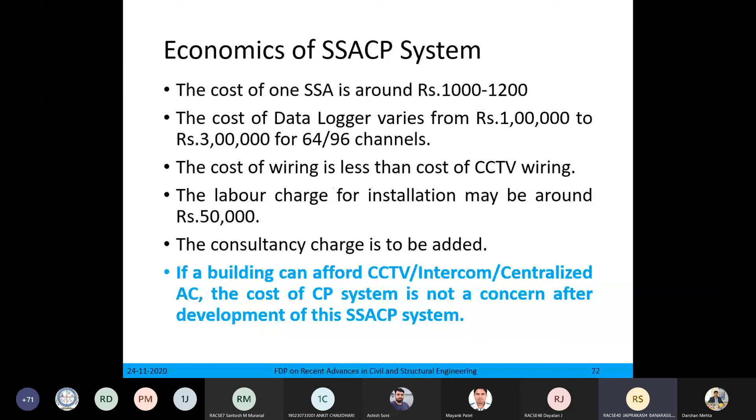So if so many buildings are there, this is a coastal city, and if reinforcement corrodes, after 20-30 years the demolition process starts. Nowadays every month at least one building is demolished because it is not maintained properly. Corrosion reaches such a level that once a part or balcony collapses, Surat Municipal Corporation gives warning for vacating, and notices are given. Sometimes it is vacated, sometimes people are wise enough and go for demolition themselves, otherwise SMC comes for demolition.

Now in Bombay also many buildings are going for reconstruction. Reconstruction is nothing but demolition of the old building and constructing a new one at the same place with more facilities. But the question is that if one building is demolished, it is loss of national property, since it was purchased with money from someone's pocket. If you demolish it, only land value remains and the rest of the money is lost. So the question is whether it can be protected or not.

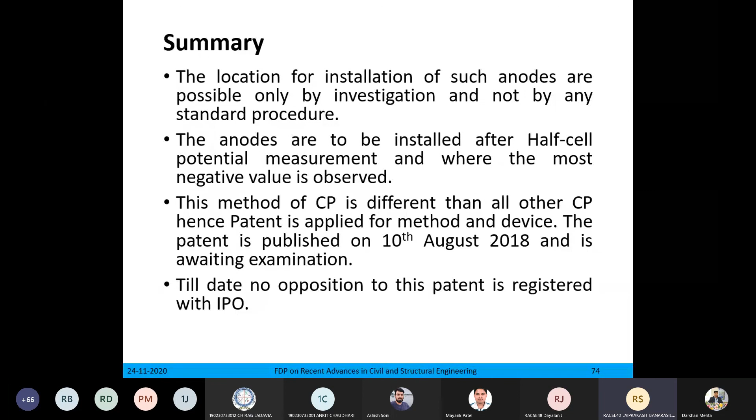Another point is that the sacrificial surface anode works effectively when installed on the surface of concrete adjacent to reinforcement. On the back side, reinforcement should be there so it gets the shortest path for flow of electrons. On the surface, the difference of half cell potential between anode and cathode is less in closed circuit than open circuit, due to resistance of concrete and steel. If you measure half cell potential separately for anode and separately for steel, you will find that when connecting them it is somewhat less, due to resistance of concrete.

Second, consider the case of a slab.

Just two minutes only. Hello. Hello, please mute, just two minutes only.

When multiple anodes are installed, there is distribution of current along all anodes. This is observed while installing these anodes. The reason is, suppose one slab is there on one corner and I am attaching it there: each bar allows flow of electrons. The bars giving the shortest path may allow more current, while bars giving a longer path allow less, but all bars are involved in allowing flow of electrons.

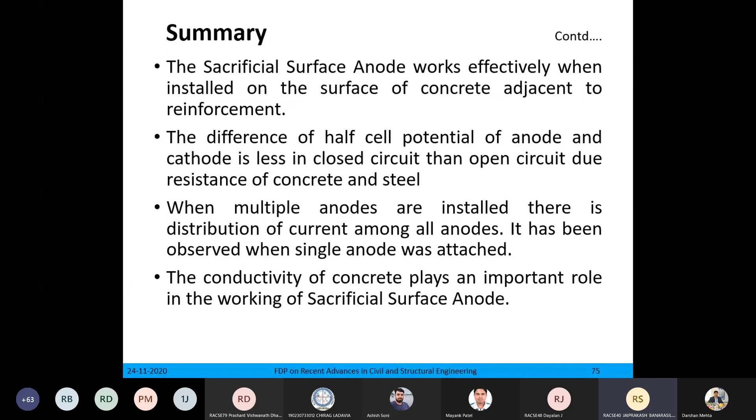Now the only major requirement of this sacrificial surface anode is the conductivity of concrete. There is one method for testing the conductivity of concrete. I use that also, but it takes much more time, so I have not included it here.